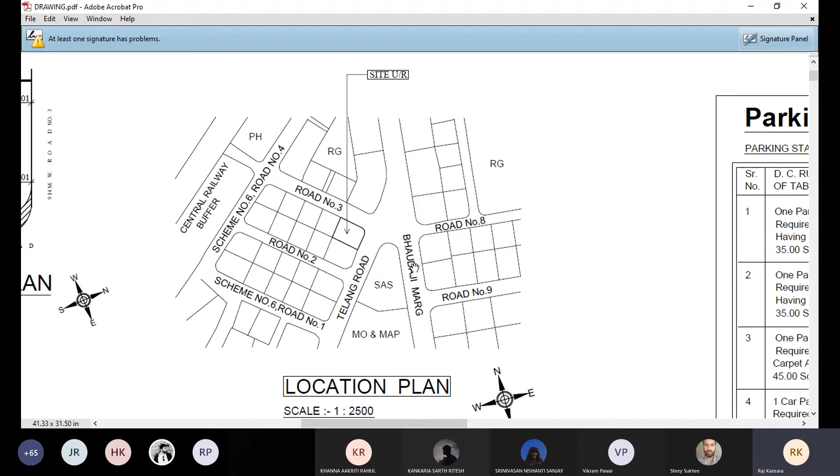Guys, the scale is also 1 is to 2500, and as you can see, it is literally your plot outline with no structures given inside. There are no trees marked at this scale, nothing. So again, when you show it, don't get too bogged down showing details of trees and some fire hydrant or this. It is a very simple grid, it has to be clean and clear, and this has been taken from the DP map, so you all also can use the same.

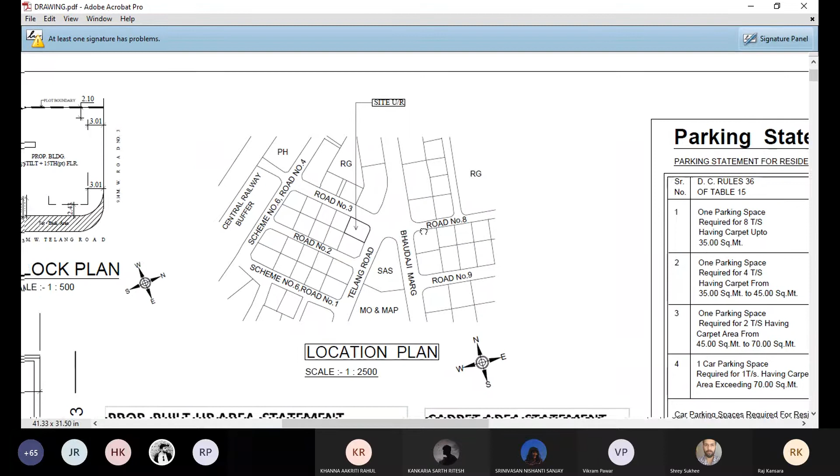Sorry, and just one thing guys, the most important thing in this, show north. North indication is very important.

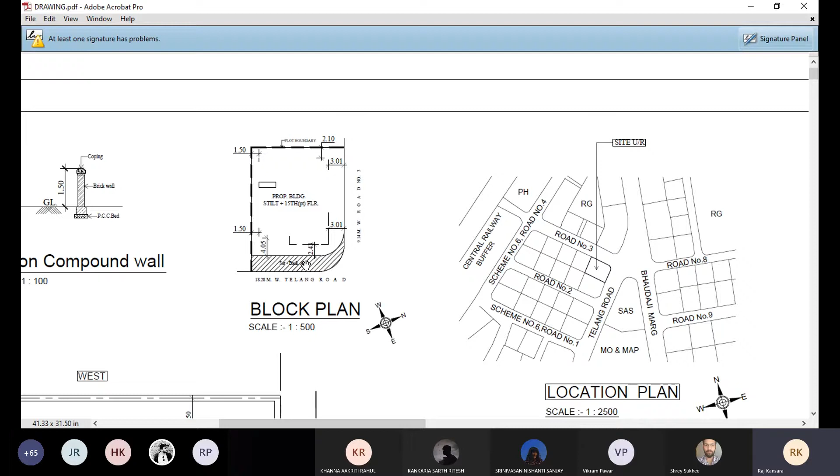Then basically for us, we also have a block plan indicating what your plot shape is. Are there any setbacks within your plot? What are the open spaces, basic things, and what is your building comprising of?

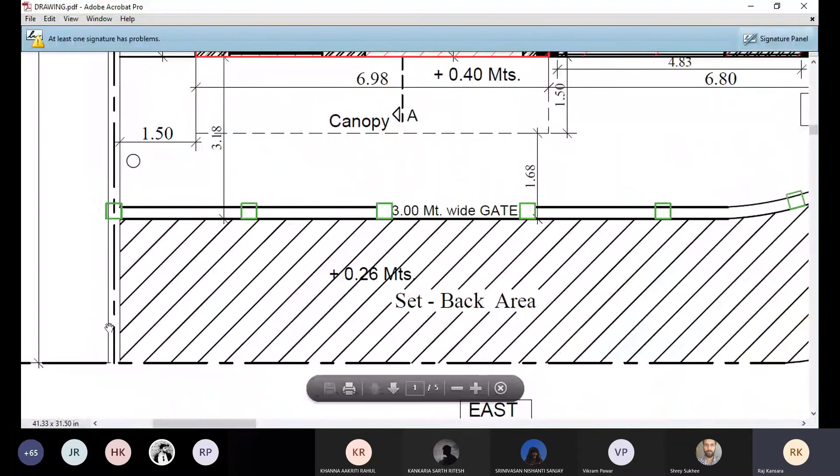So I'll just start off with the basic thing, which is a ground floor plan. This building comprises of what? Basic entrance lobby. Like if you see this dotted line here, okay, this is basically my plot boundary, this entire thing.

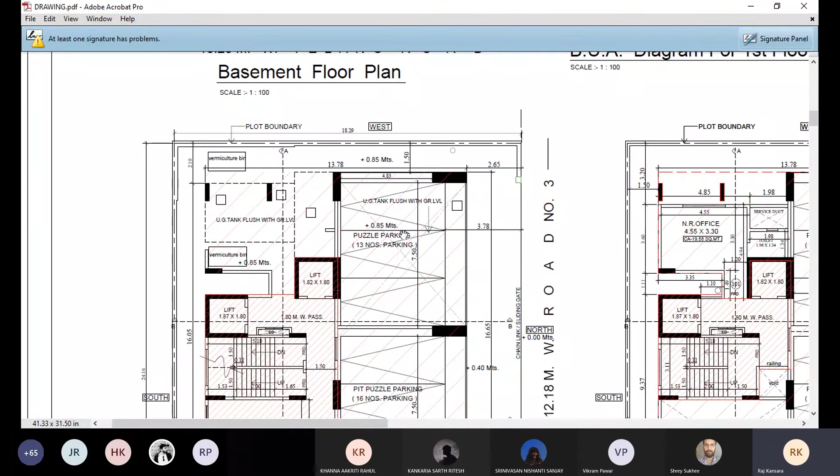This is my plot boundary, and this double line is my compound wall. So the plot boundary, compound wall is always shared with the other plot, with the adjoining plot on either side. Only it is that in the front we have the compound wall within our plot boundary.

So this plot is located in such a way that we have two roads, and there is a road widening on this side of the plot. Hence, there is a setback in this area.

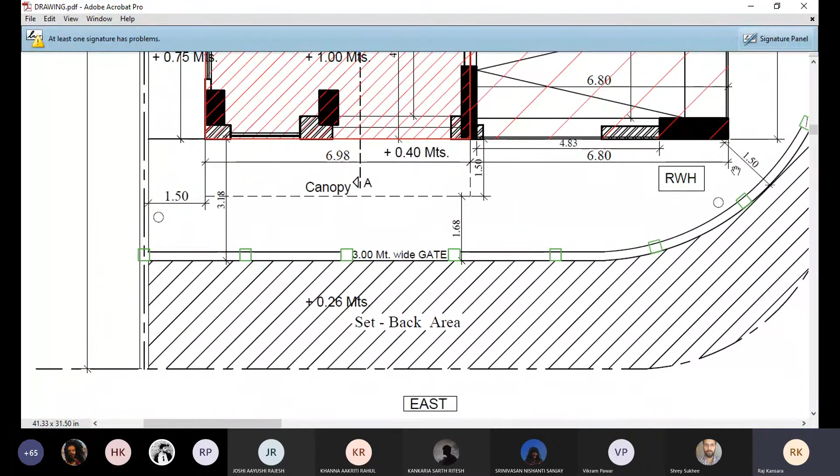So there are two types of setbacks. One is a setback mainly for the road widening purpose, and one is a setback which you provide within your plot. So there is this one setback and there is this one setback, which is 3.18 right now seen over here, 1.5 meters on this side, 2.65 here. Don't get confused with the setback as just within the plot.

So you can also term it as the setback as open spaces within your plot, and this becomes your road setback.

Clear till this point, or you want me to speak more about it? Go ahead.

Don't go by the kind of open spaces of 1.5 meter provided in the plot, because these are highly dense plots. Building open spaces are difficult.

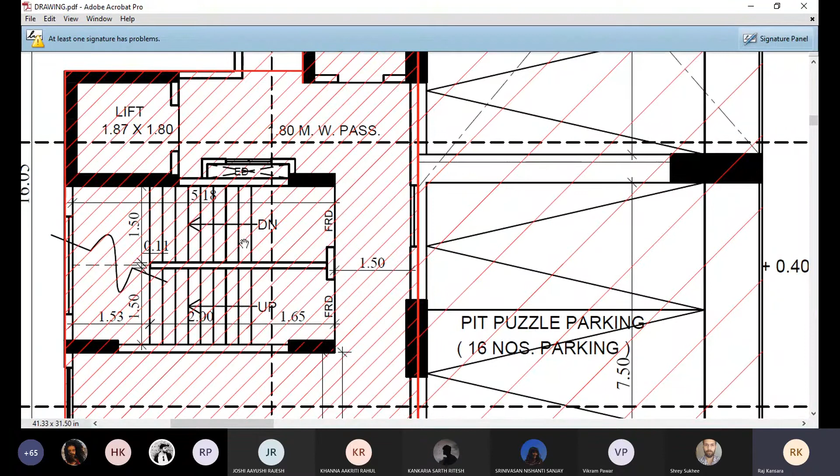So now if you see these areas, this is the lift, there's a lift lobby, staircase. So this is how we indicate the staircase going up. This is going down to the basement. You have to dimension them, give dimension of 1.5 or so, basically in your institutional buildings you will have a staircase of 2 meters, and a clear passage also has to be of 2 meters.

Here on the ground level you just have your entrance lobby, lift lobby, this is your stilt, and what I have is a parking system over here. It's a puzzle parking system. Anything that is claimed free is hatched in red.

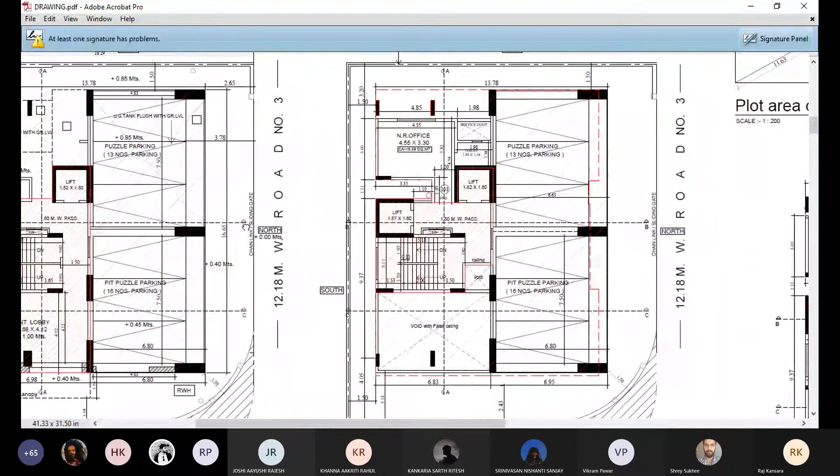I'll just go to the main level residential floor plan. If you see in this case, this lobby portion is claimed free of FSI.

So generally when we ask or when we claim the area which is in front of the staircase, okay, we always have the door opening as 1.5 meters. Since we have a landing of 1.5 meter, we get a front open space of 1.5 meter free of FSI.

Rules have changed now and it has become 1.5 times the width of the passage. So your width of the passage, assume it is 2 meters, you will get it as 3 meters. You'll get the passage of 3 meters in front. Similarly for the lifts. So in this case, my entire passage is claimed free of FSI.

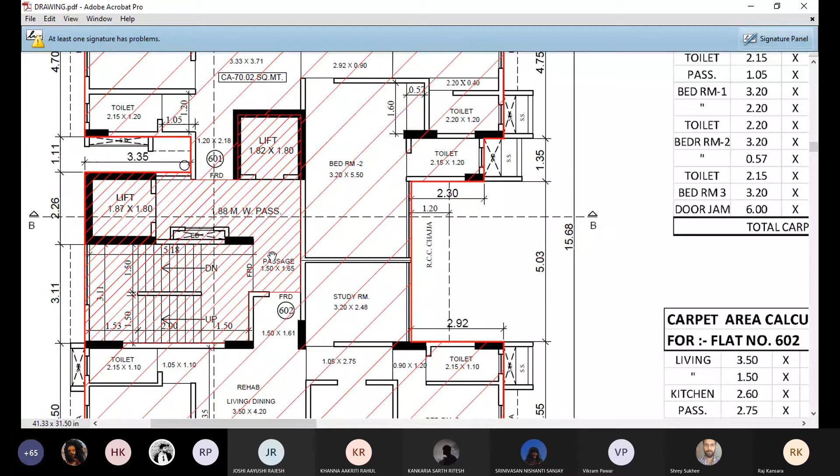Yeah, guys, anything you want to say, just go ahead. Anything you want to ask. I don't want to rush into everything, so let's just take one thing at a time, guys. It's great that you all are understanding this, but please jump in at any time, because I know to some of you this might make sense, but to a lot of you this will be alien, Greek.

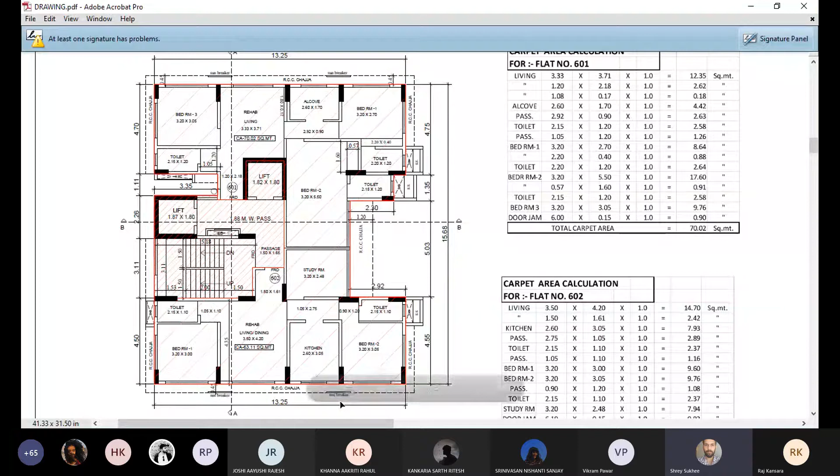Can you just repeat the passage thing? I didn't... I'll get it, just a second.

What I'm trying to say is that this landing is 1.5 meter by 1.5 meter. The staircase width is supposed to be 1.5 by whatever the length is. But at least this distance here, if you see, is 1.5 meters.

So while claiming the passage in front of the door, this is an FRD. How much will I get? At that time, I will get 1.5 times the width or the depth of the landing. So that comes to around 2.25; 1.5 by 1.5 is 2.25. So I will get a passage equivalent to 2.25 in front of this FRD. Although I have a wall here, so I can claim only up to this area as free. Clear with this? Yes, got it.

What is an FRD? FRD is a fire resistant door. All staircases and all the main doors for your apartments will have a fire resistant door. A fire resistant door for staircases is for up to 2 hours, meaning during a fire your door should resist the fire for up to 2 hours. Because during fires you cannot use a lift, you have to use a staircase. If there is a fire in the lobby area or any part of it, the staircase is the only escape route.

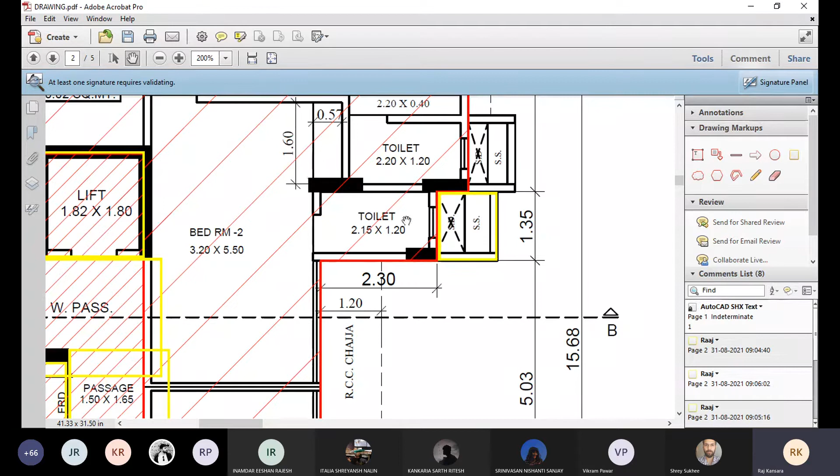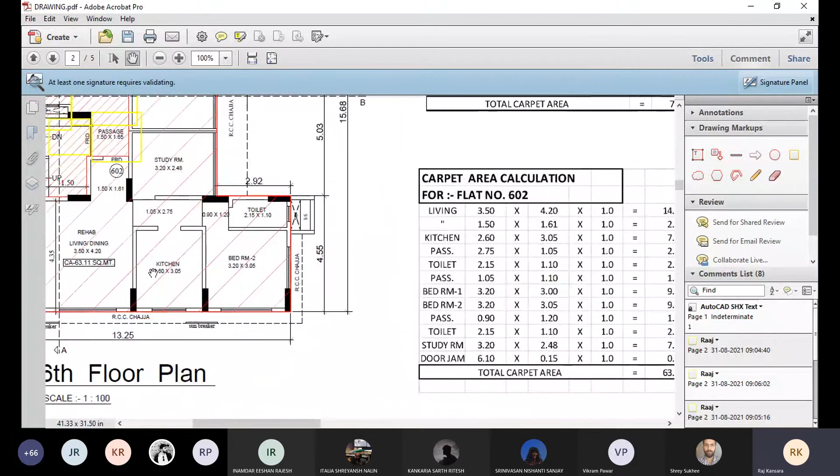Also, there are these ducts abutting the toilet. These ducts are allowed only up to 1.2 meters from your toilets, and these are claimed as free of FSI. The rest, everything here, is counted in FSI: all your columns, internal walls, everything. Just one diagram I'll show you. For flat number 602, we have the carpet area calculation. You have your living room, your areas.

This is how you calculate the carpet area for your flat, any room, or the entire floor. Right now this is a residential building, so we have carpet area only for the flats. In an institutional building, you can have carpet area for individual rooms or for the entire floor. Generally, institutional buildings may not require carpet area calculation as such; they'll need it for commercial, industrial, and residential buildings. I'll keep the screen on so you can relate it to the plan and the calculation.

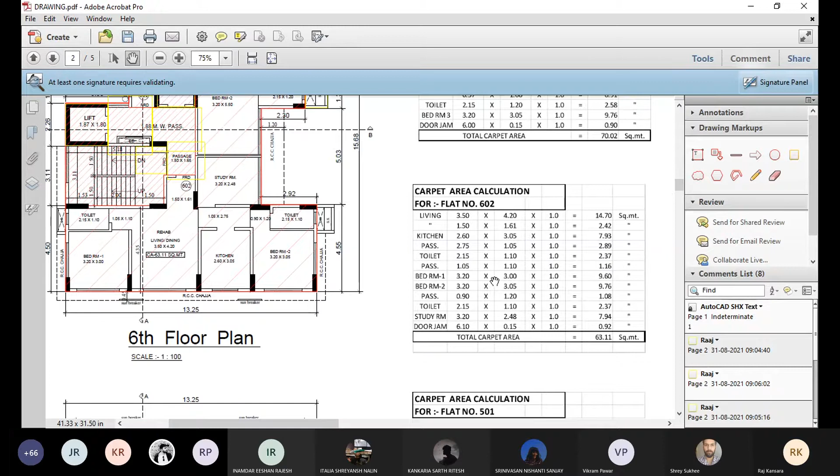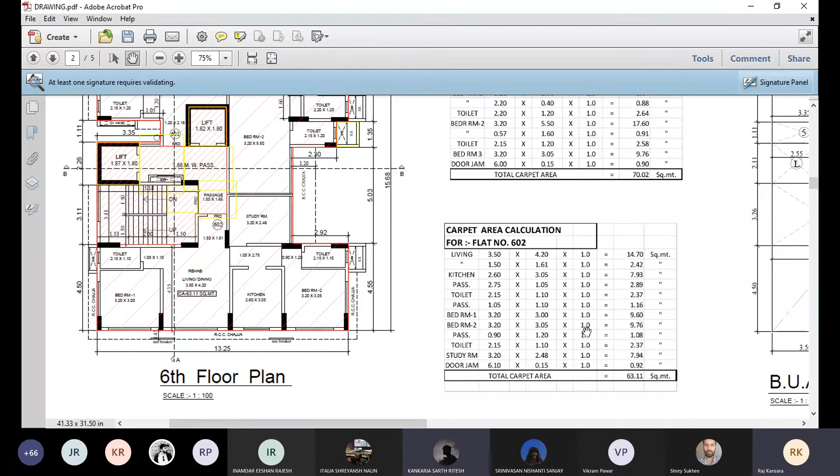Should I go ahead? Let me know. The third column is the number of units, right? Multiplied by 1.0. Yes, this is a factor. I'll show you one more factor, a little different from this.

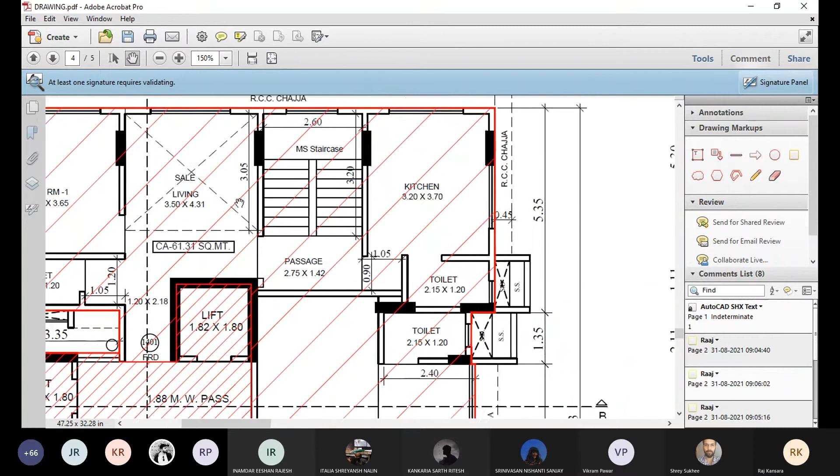If you see this factor here, what I have is a duplex flat on the 14th floor. This portion is a double height space. While doing the area line diagrams, this is number 3, the double height space. So while calculating the area line diagram for the 15th floor, this number 3 is 0.5 times. Basically, any double height space you provide, say beyond 4.2 meters, is counted 1.5 times the area.

So this portion here is basically counted 0.5 times extra than the entire floor because this is a double height space. A double height space in your lobby area is not required to be counted, but within your habitable space, let's say within your office room or in your classroom, a double height space will be counted

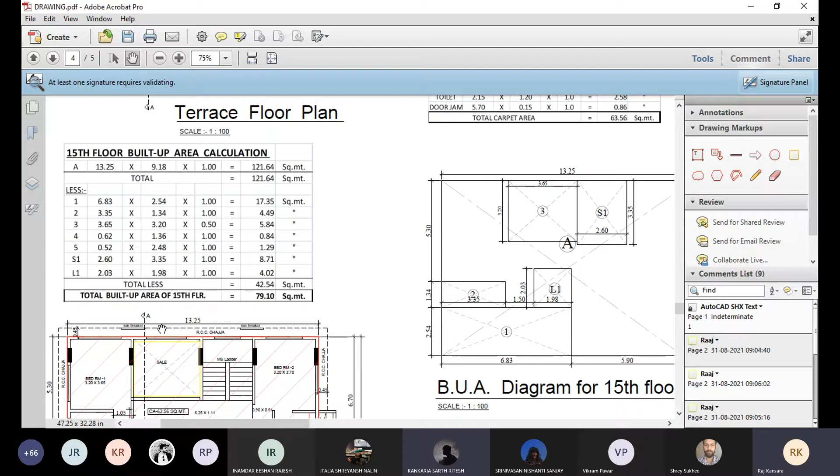1.5 times. For example, let's say your area of a classroom is 10 square meters, but the height is more than 4.2 meters, let's say 5 meters or 4.5 meters, then that 10 square meters gets calculated as 15 square meters. Okay, yes, understood. So only the portion which is a double height space. But why is it 0.5 times? Because one time it is already counted at this level.

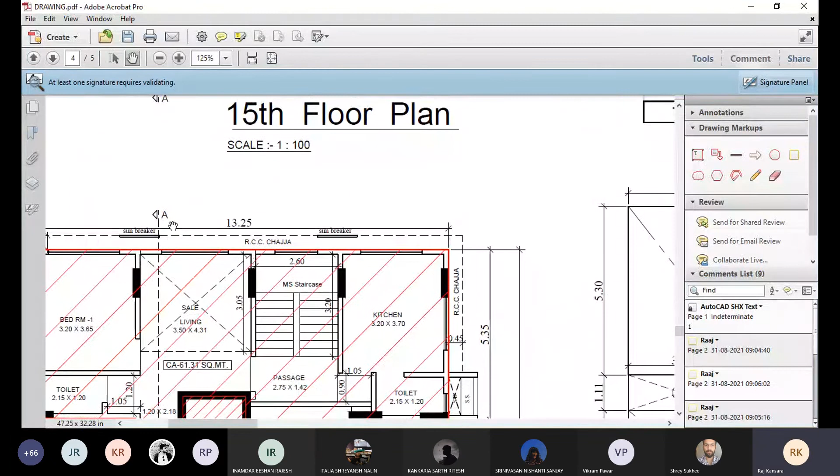See this 15th floor diagram. Okay. This space, if you see this cross here, and if you can relate it with this diagram, this is your L1, this is my L1. This is my L1, and this L1 is here. So if you see, the space behind your L1 is this. This portion is already counted once. Only the double height space, which is across here, is counted additionally 0.5 times. So that means this portion only is 1.5 times.

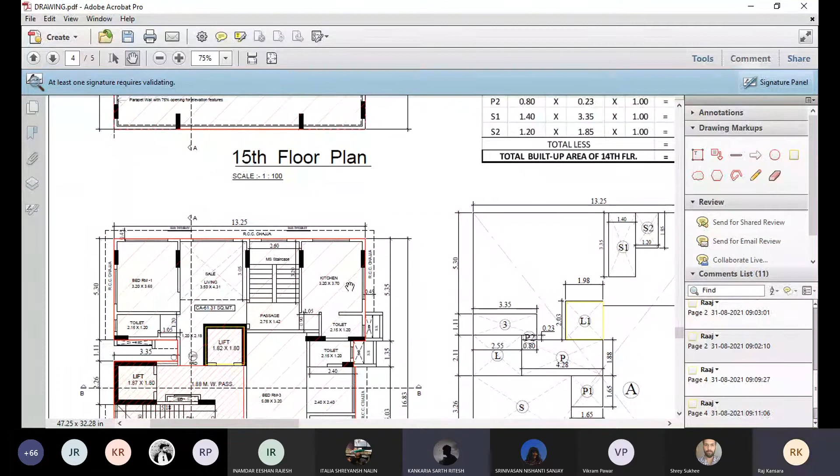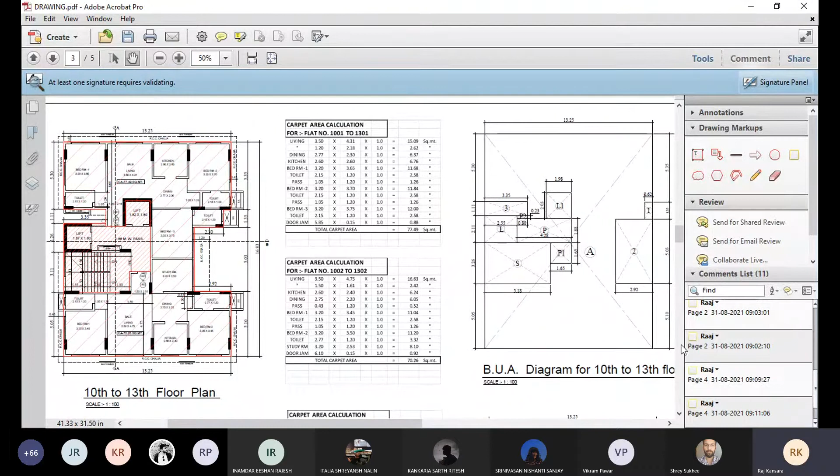Okay. So basically in the 14th floor, we multiplied by 1 and then the 15th floor by 0.5. Yes. So see this. There's no deduction in this point here because I'll explain how to calculate the diagrams here, so likewise you'll understand. Okay. With an area line diagram here. So can you see both the 10th to 13th floor plan and the area line diagram here? Okay.

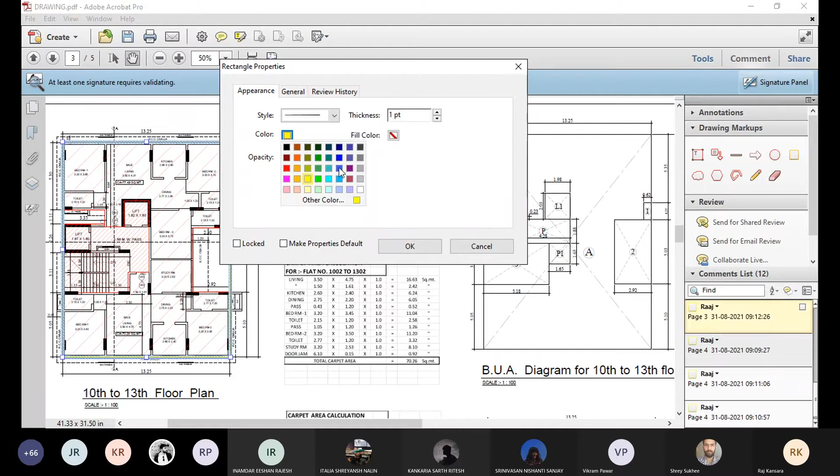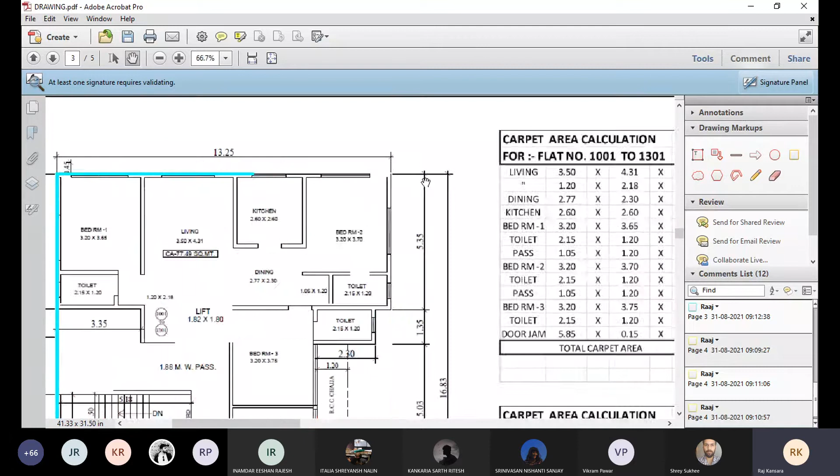Now, while doing so, you have your plan ready. What I will always do is at the maximum border, I will make a rectangle or a square or whatever the shape is. So this here is my outer line for your building. See this 13.25, 13.25. This is 16.83, this is 16.83. So this is my outer boundary. My outer boundary has nothing to do with any kind of chajja projection or ducts. I need not include the ducts in my building line.

Similarly, when we have stairs on the ground floor for reaching up to the plinth level, do we need to calculate them in the building line diagram? Yes, the staircase is a part of the building line and that gets deducted at a later stage. But you have to consider that as a part of your building line. So when I'm looking at the area line diagram, you have to make sure that your building dimensions tally with the dimensions of your built-up area diagram. Okay.

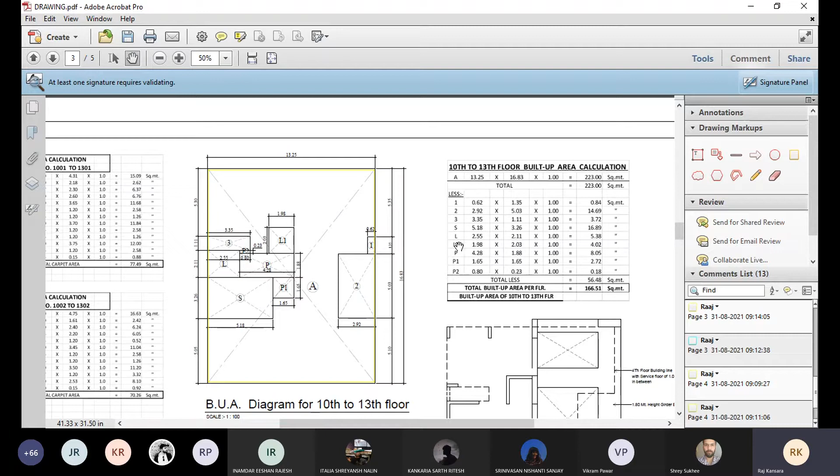Now, when I'm making a table for calculation, you see that this entire rectangle is basically A. So what is A? A is 13.25 by 16.83. So this is my area of that particular floor, 223 square meters. Now when I'm deducting my non-usable areas or areas which are claimed free, I will start deducting the larger chunks. Like this thing is a void. I'm not using this.

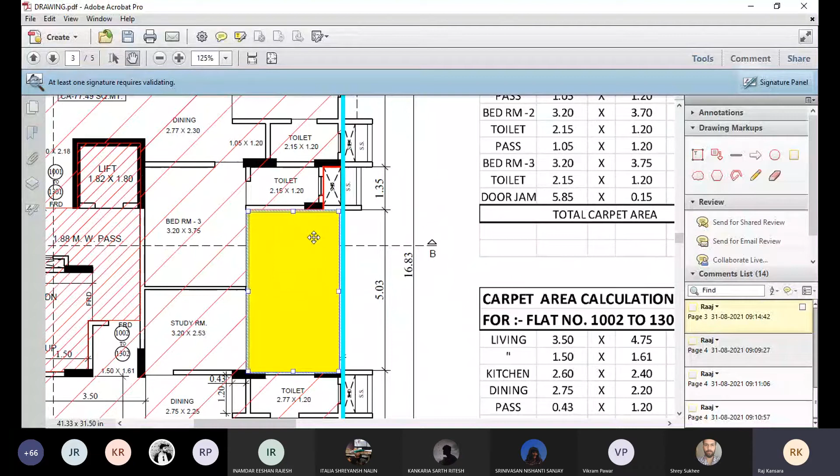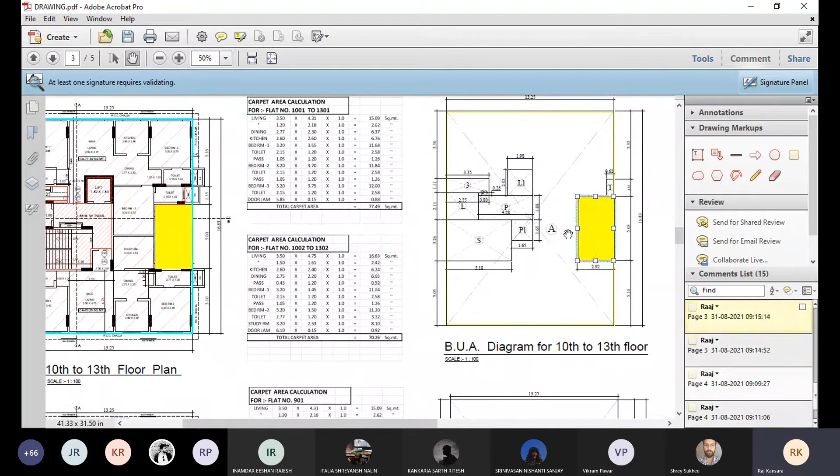This is in the blue line and between the red line, which is my building line. This is a void. This void is reflected as number 2 here. You see this 5.03. This is 5.03 here. Got this till now, guys? Yes. Okay. So first, we need to just deduct the areas which are not a part of the building at all. That is, between the red line and the blue line.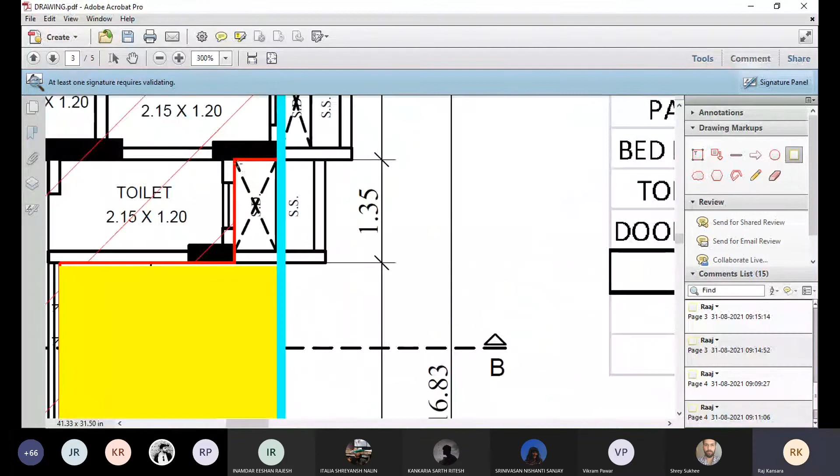I will deduct this portion as well. I will go and deduct this space from here. Are there any other voids which I need to deduct from this right now? Can you all tell me if there are any? Or are we basically done with deducting the voids between the blue and the red line? Guys, please speak. The lift well area won't be deducted? Which area? The lift well. It will get deducted, but I'm saying that this yellow portion marked is excluding the building line. The staircase is still a part of the building line.

Next thing what I will deduct from my building line is the staircase. Basically this entire chunk here. I'll make this as my staircase. Then this becomes my lobby in front of the staircase. This is one more rectangle and the balance one here. I'm just not able to draw it right now, but yeah, something like this. Portion here.

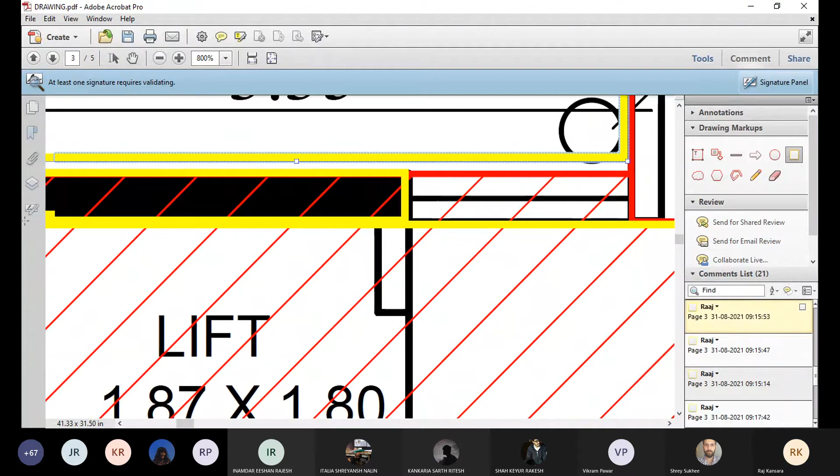Basically, this is how you start deducting the area. So whatever the area balance remaining becomes your built-up area or the FSI area that is counted in your FSI. If you can relate this diagram to the one here, S is my first staircase that I marked here. Then the P1 is the passage in front of the staircase. Then I could have taken this all the way here. Okay, so this becomes my L and P together. Then this one is L1.

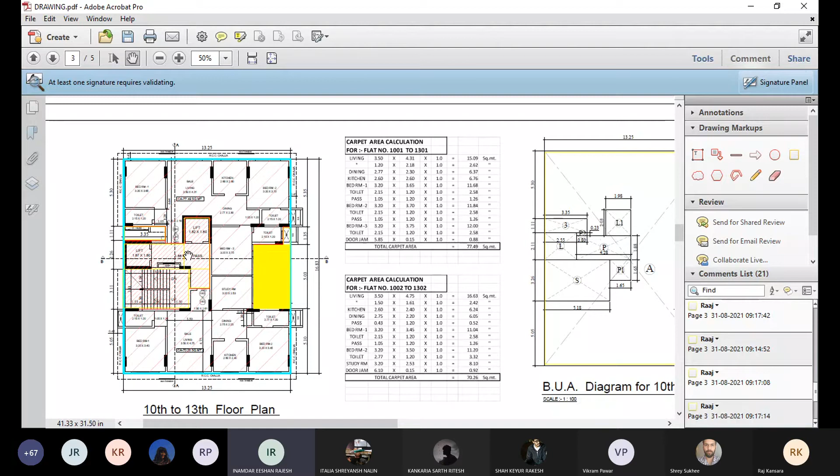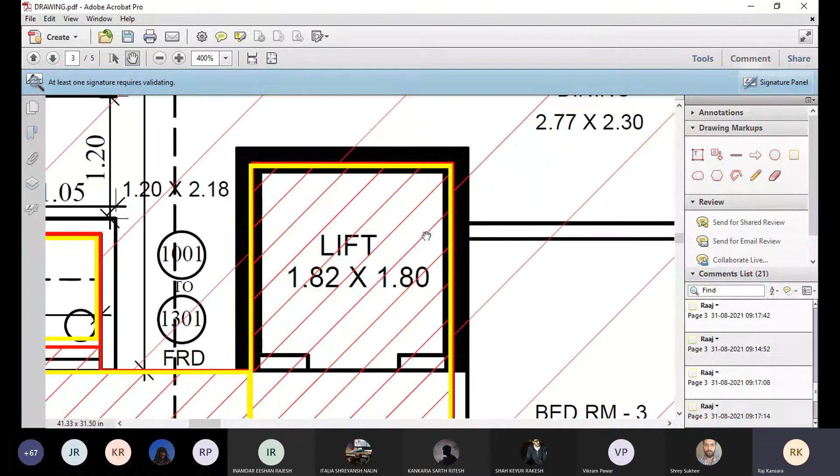All these areas are including the internal walls, right? Yes. So if you see this, basically a shear wall is around, let's say 300 or maybe 230 thick. So what the BMC or the corporation allows is that you count only 0.15 in your area and another 0.15 or 0.08, whatever the balance is, can be a part of your lift.

Okay, I'll explain once again. I have a wall which is 300 thick, and that wall is an RCC wall, a lift RCC shear wall. I will only count 150 of the wall towards my habitable area. Balance 150 will become part of the lift. In case the wall is 230 thick, then I will count 150 towards my habitable area and 80 towards my lift. In cases of high-rise structures, let's say 120 meters, 180 meters, or anything above 70 meters, where my shear wall is let's say 400 thick, I will consider 150 as a part of my habitable area and the balance 200 or 250, whatever that is, will become a part of my lift area.

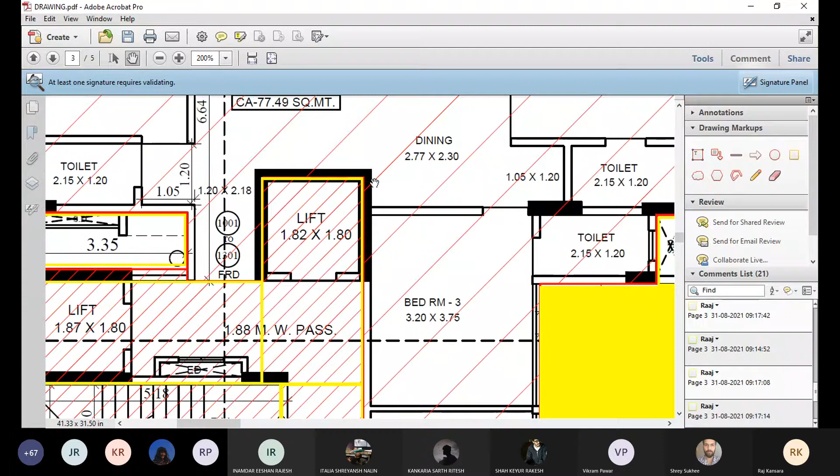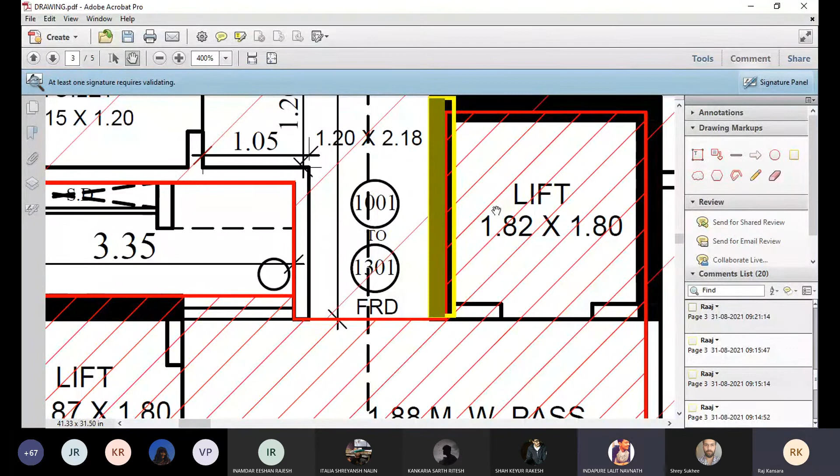Are we clear? Can you just repeat which part? The lift 150 mm? Okay. Basically this wall is say 300 thick. I will count this much portion, that is 150, extend it till here, in my habitable area, because I have an apartment or a habitable room abutting to the left. In this case, I do not have any habitable room touching here, so I have considered this entire wall as a part of the lift. Whereas in this case, 150 is counted towards the habitable area and this 80 is towards the lift area. Clear on this? Yeah. Okay.

Sorry, Raj, just to add on to it, some of you might be wondering, such a small area, what difference does it make? If we take that 1.8 meters into 0.15, that's 0.27 square meters. Into how many stories? This is a 13-story building. That's 3.5 square meters, so it comes to around 38 square feet. That's just on one side, and assuming we do three, you're basically getting around 120 square feet extra, which you can utilize in increasing the area of what you are building. Which is why these small numbers, when stacked one on top of the other, multiply, and why it's important to do these calculations very carefully.

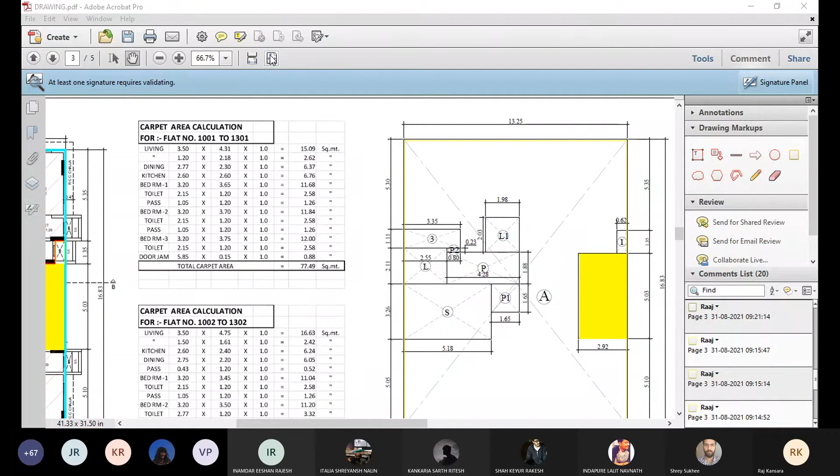Sorry, Raj, back to you. Yeah. So are we clear on this right now about the area line diagram? Yes. Okay.

So once you have your area line diagram for all your floors, the next thing to do is to show your proposed built-up area statement from basement, ground, first, second, third, fourth, whatever the floors are. In my case, there is no FSI calculation on the basement floor or ground floor, nor on the parking level. So my FSI area is only from the fourth floor onwards. So you will show the area of the staircase and the area of your ground floor, first floor, second floor. You will have to make the area line diagrams and make a table similar to this.

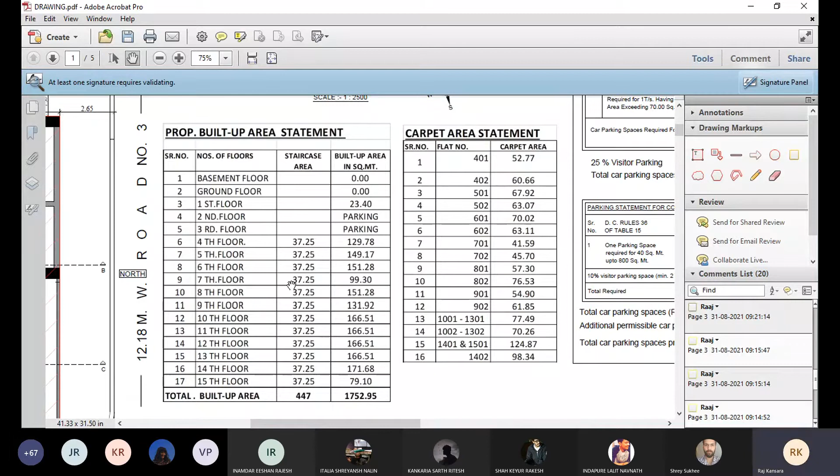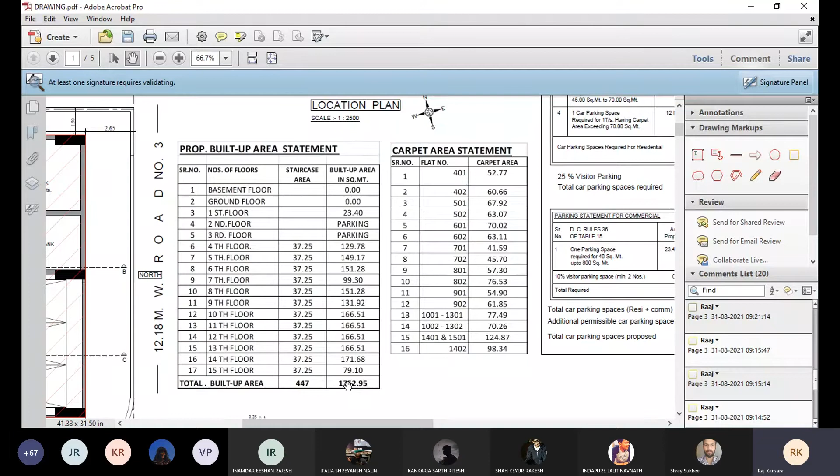After doing this, you will have a total area which is being consumed in your building. This is your total built up area then. Are you clear with this table for total built up area? Yeah. Okay.

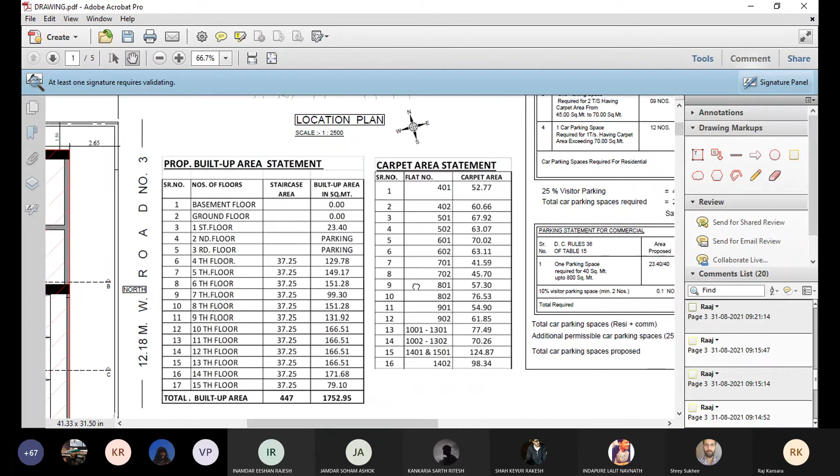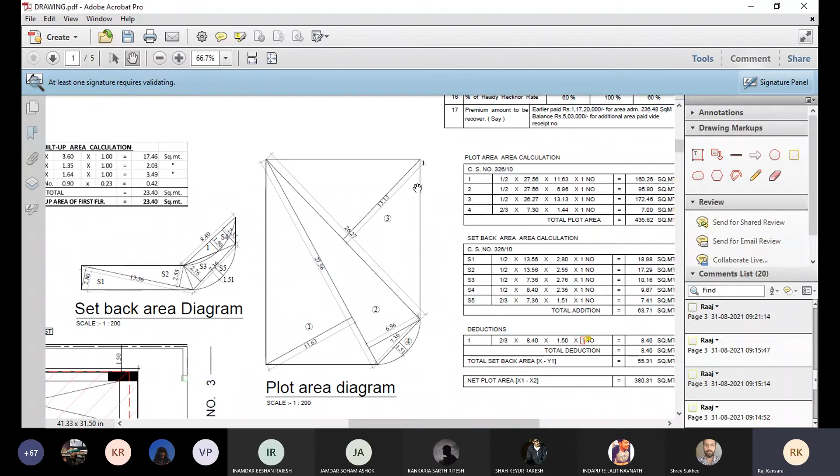Again, now when we are doing a plot area calculation, generally what you do is while making a polyline, you can directly get the area of the plot. But you have to divide your plot into multiple triangles. Larger the better. Okay, larger the triangle, better it is. So by triangulation method, you have to calculate the plot area. If you see this, this plot is divided into 1, 2, 3, 4 parts. Okay, and for that, the area is reflected or calculated here in the table.

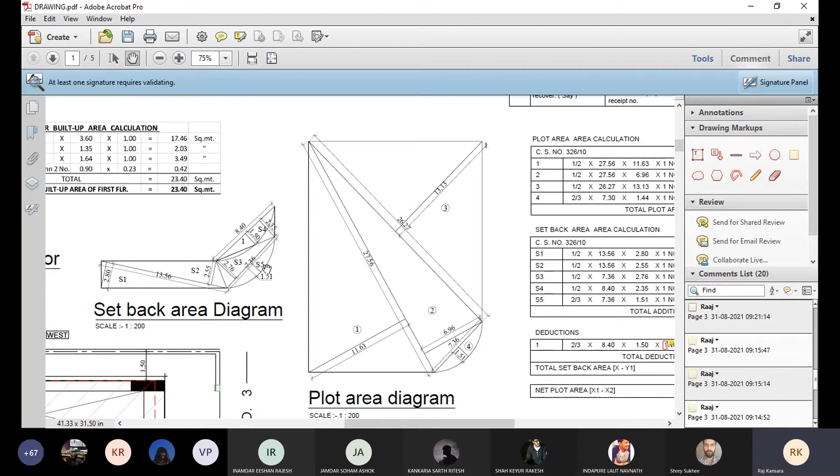So there's a separate area line diagram for the plot and there's a separate area line diagram for the setback area. Do not get confused with the setback area with the open spaces that you have to provide within your plot. So this is basically a road setback area. Let's say in one of your cases your road width is only 5 meters or 6 meters, and that road is supposed to be widened to maybe 12 meters. So you will have a setback of 3 meters within your plot, or depending on the remarks given by the development department.

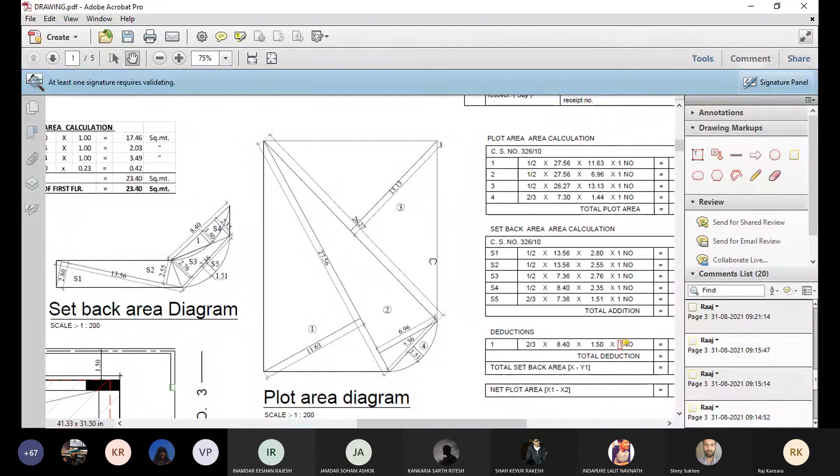So in your sheet composition, what you will have is your plot area diagram. You'll have the calculation for plot area diagram. You will have your block plan. You will have your ground floor plan, first floor plan, basement plan, all your floor plans. You will have the built up area diagrams, basically something like this. So you'll have your floor plan and your built up area diagram beside that, and you'll have your area calculation there itself. Okay. I cannot say that my floor plan is here, my built up area diagram is here, and my table is somewhere here. That is a very wrong way to do it.

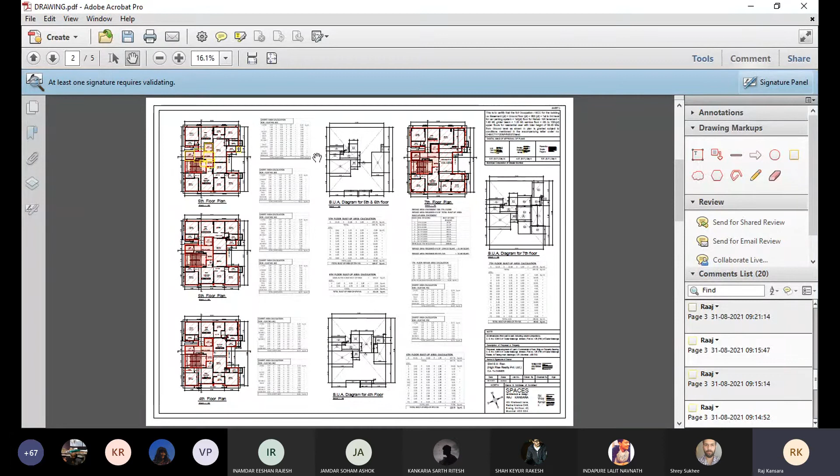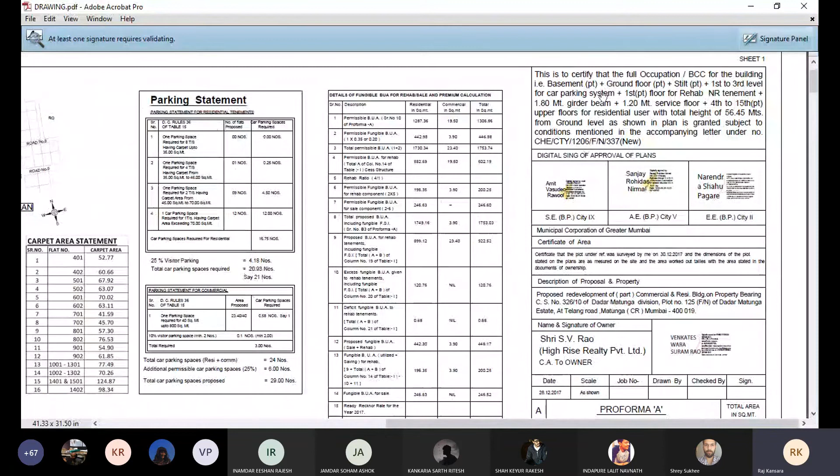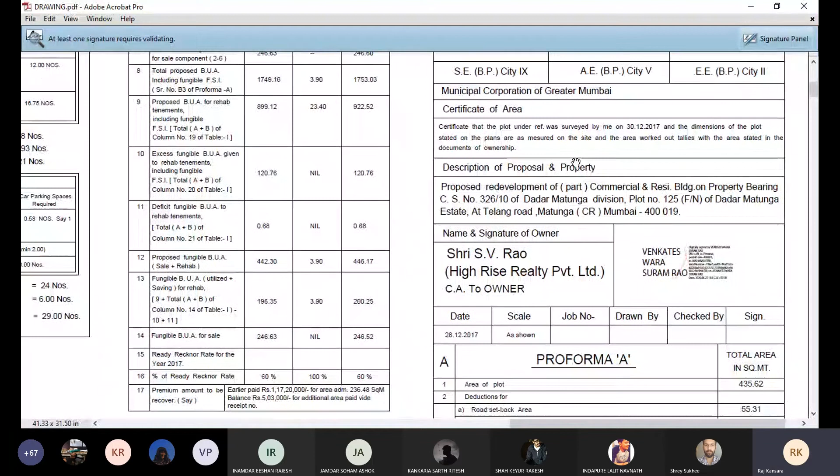And what I will also have is the proposed built up area statement of all your floors. Also have a calculation of your carpet area of maybe just one floor is also fine. And here again, we have a complete set of pro forma A. This describes what the building is. What is the purpose? There's a particular file number also to it. These are the signatures of the authority from the municipal corporation. This is the owner. This is the detailed description of the proposal of the property. And this is a pro forma A, basically from where we understand the FSI calculation as a gist.

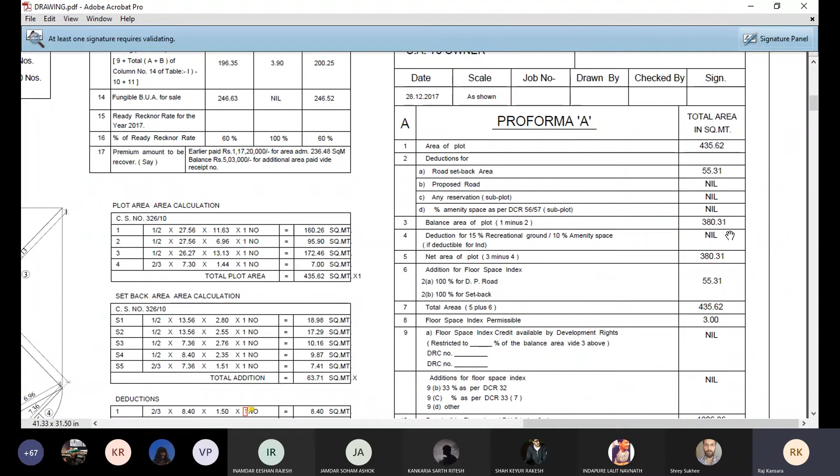So first we have your area of plot. This area of plot is defined in the property card. Sometimes the property card may not reflect the area accurately, so there are other extracts also to define it. So there was a road setback in my plot, which was 55.31. My net plot comes to 380 square meter. Here I have an FSI of 3. So 3 FSI on a plot area of 435 square meter turns out to 1306 square meter. So you start filling up these details based on what your planning is, what your FSI is. And then here I have the permissible fungible built-up area and proposed fungible built-up area. So similarly, my total permissible area works out, and what I have proposed also has to be mentioned.

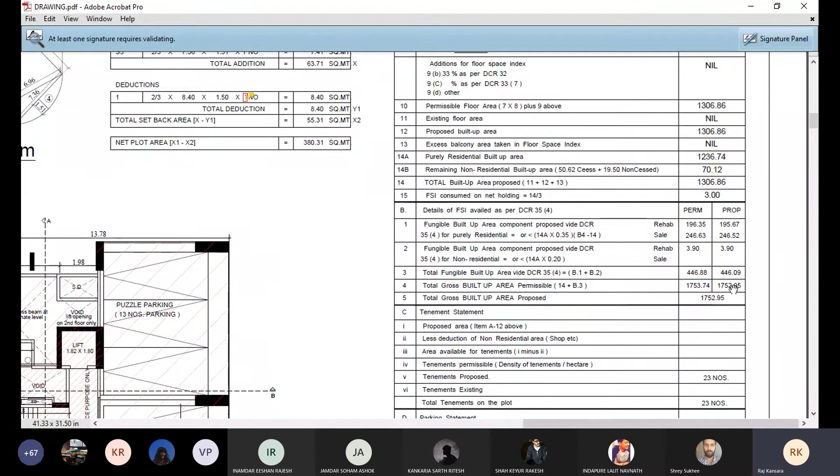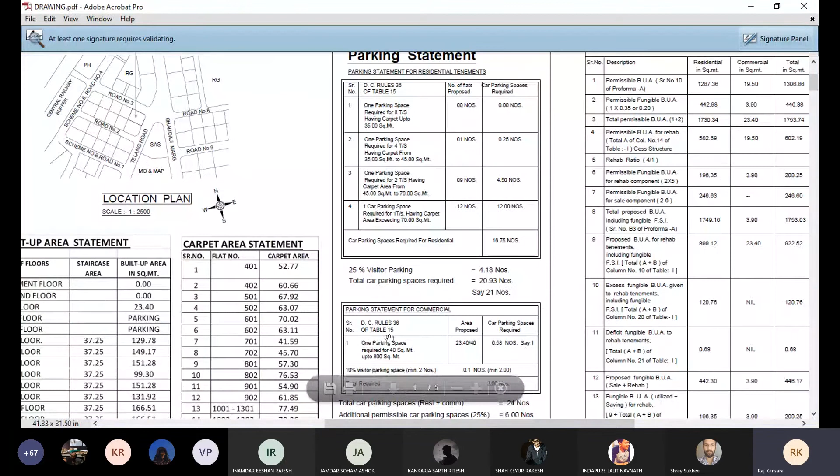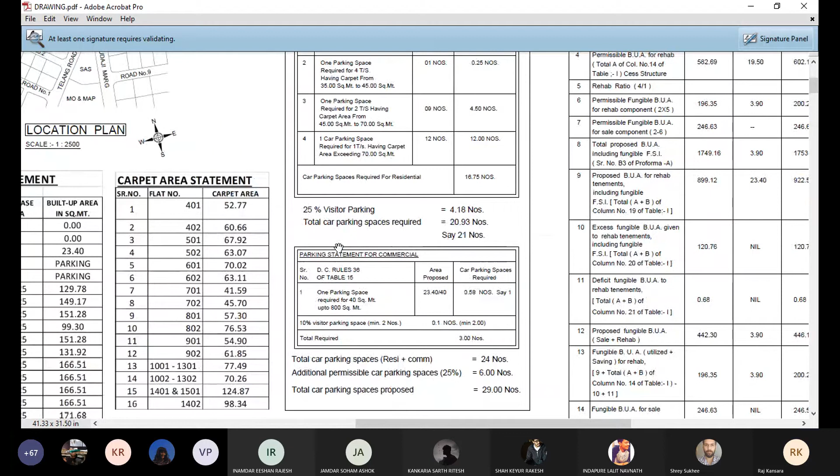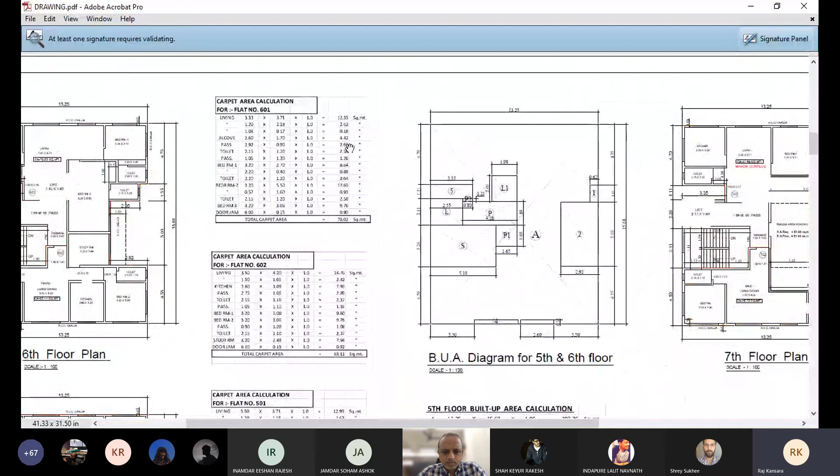If you have a water tank in your basement, you do not show that as a separate diagram. So you have your floor plan, your built-up area diagram, and its calculation, your built-up area statement calculation for that particular floor. Also, on any one floor you can have your carpet area calculations. And basically you will have your built-up area statement of all floors together. The area that you claim free, you can mark that as a red hatch like this.

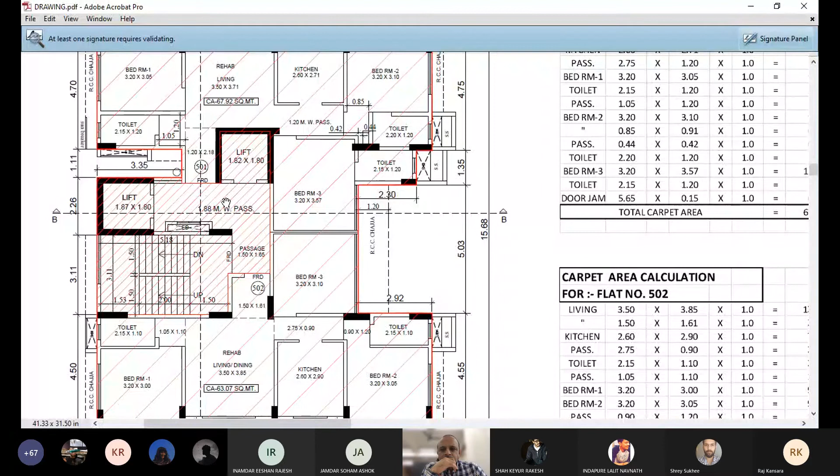And the last thing, you will need to also have your sections. Maybe two sections from the basement or ground to the topmost terrace, including your water tank and your staircase room above. Very clear?

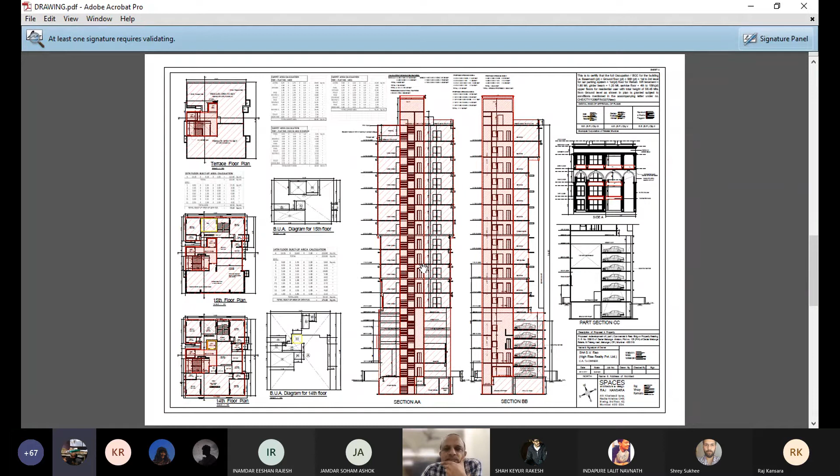I have a doubt. What happens when there are semi-open spaces and courtyards in our buildings? How do we calculate? It is case to case. But as a benefit of doubt, right now for you all, I guess we can keep the semi-open spaces and courtyards as free of FSI. Anything that is buildable will get counted towards your FSI. But things which are open to sky or open grounds will not be counted.

Guys, if you still have some confusion, please go ahead. Just speak. Just ask your questions, queries, or your doubts.

I think if you guys start with this sheet. Raj, how many sheets does it amount to? Maybe 2 sheets. If they can compose it within 2 sheets, that's fine. Correct. Max. And for the environment ministry, there will be a presentation format, right? Or we can convert that also into a sheet? No, we can keep it as a presentation format.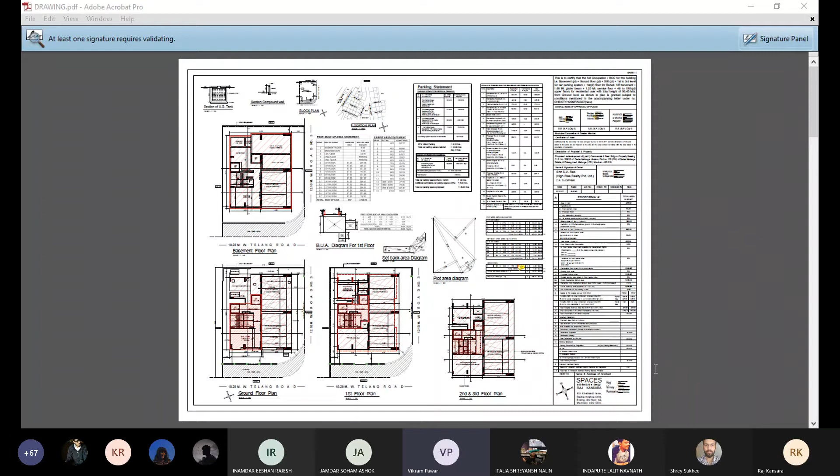To elaborate further, many times departments, even municipal ones with an environmental cell, expect a presentation to be submitted. The print copy of that submission presentation itself is submitted, with area calculations already embedded showing how we arrived at them. If they have further concerns, they'll expect the detailed drawings, but since you've already submitted the submission drawings with the building layout details, that is considered already submitted.

So as far as you're concerned, this has two parts: one is these two sheets of area diagrams and submission drawings for the municipality, and the second is the presentation you'll make for the environmental cell.

Vikram, I have a suggestion. Guys, whoever is the CR of the class, if you can get a copy of the Cochin building guidelines, whatever the municipality of Cochin stipulates, and share that with the class, I think that would be helpful. I think they were already referring to the DCRs when they were designing the ADU. Then it's perfect, I did not know that. Someone can please confirm this from the class.

Hello, guys, can somebody please confirm this information? We all have access to the building guidelines, right? We downloaded it recently, but we didn't use it for IDS last semester. Okay, but you have access to it? It's available online. Yes, I know it's available online. Just make sure you all share it as a class and start referring to it, because you may have to make changes.